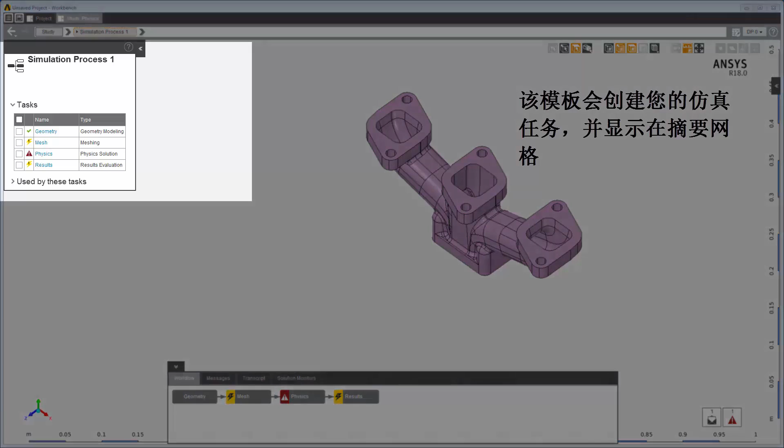The simulation process is made up of distinct but connected steps. AIM calls these tasks. The template creates the tasks of your simulation shown in the summary grid and in the Workflow tab of the View panel. Each task is a connected step in the simulation process. Click on the task to open that task's data panel. Each task is a container for all of the objects and settings within that step.

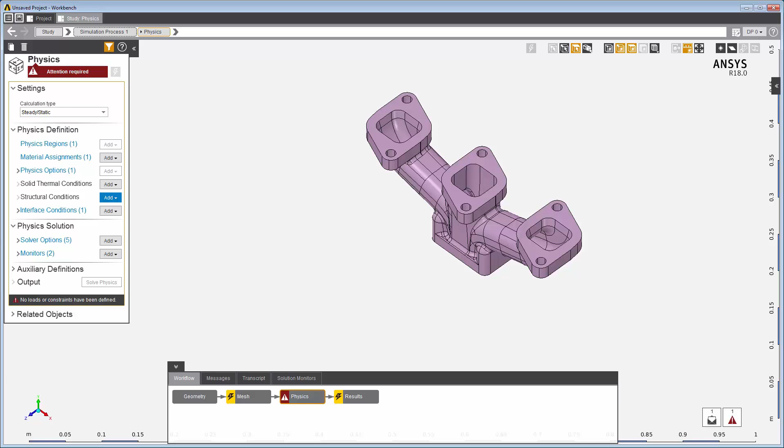Although the starting template adds objects and default settings, you can change any of these to match your specific simulation. If you have questions as you move through the workflow, clicking on question marks will open different kinds of help. Let's start setting up the simulation. Because I enabled model editing, the geometry task is where I can edit the geometry file. Here you can modify an imported geometry or even create a new geometry. Return to the physics simulation by clicking here.

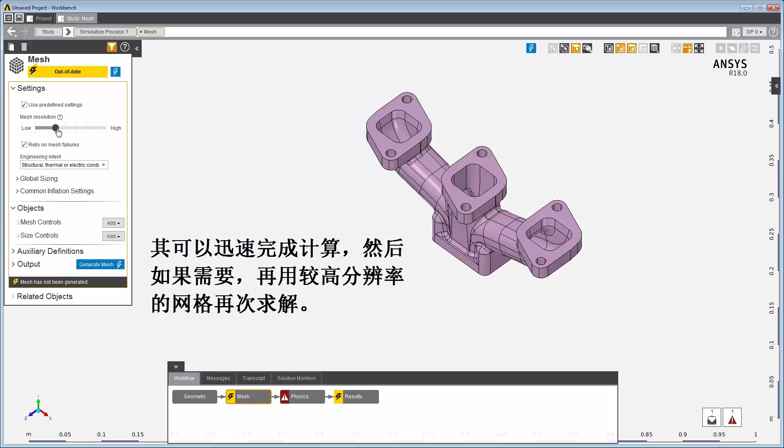Next is the mesh task. Let's review the setup in the mesh data panel. How fine do we want the mesh to be? A good strategy, especially for larger models, is to begin with a lower mesh resolution that calculates quickly and then, if needed, solve again with a higher mesh resolution. You can always come back and refine the entire mesh or add controls to refine specific areas of interest. Updating the mesh task generates the mesh.

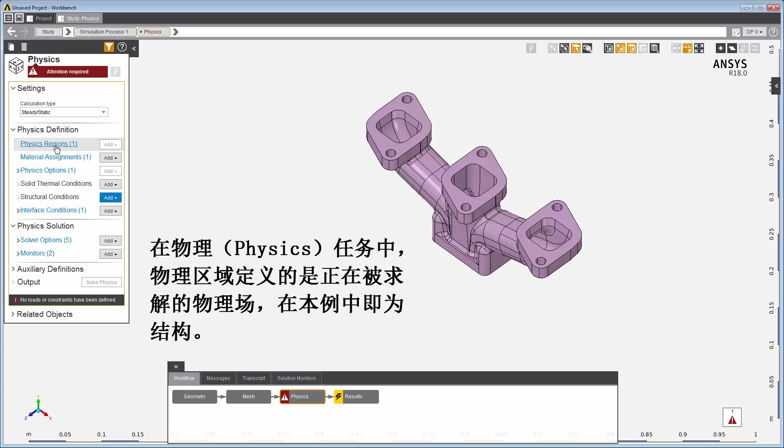Now let's look at the physics task, the next task in the workflow. Here, we set up and solve the physics solution. Again, all of the objects and settings defined by the template can be modified for your own requirements. In the physics task, the physics region defines the physics being solved, in this example, structural. The location field shows that all bodies in the model are part of this physics region.

There are visual cues and messages to help you set up tasks. Attention required means that objects are missing or need information before you can update this task. The Messages tab summarizes the changes needed. Here's a blue color cue to add structural conditions. You can add objects here in the data panel.

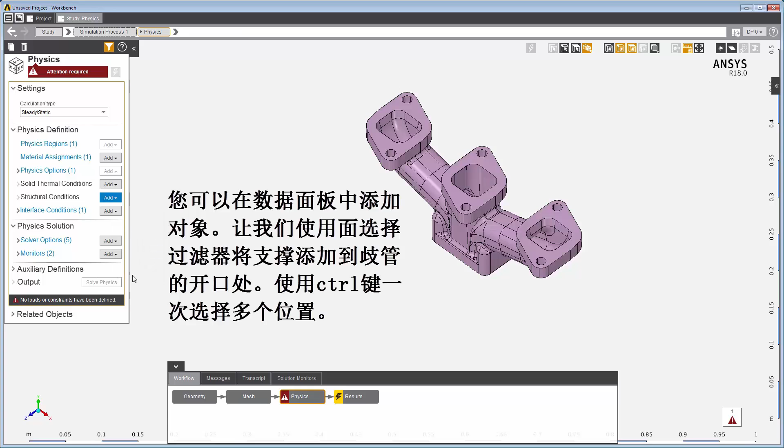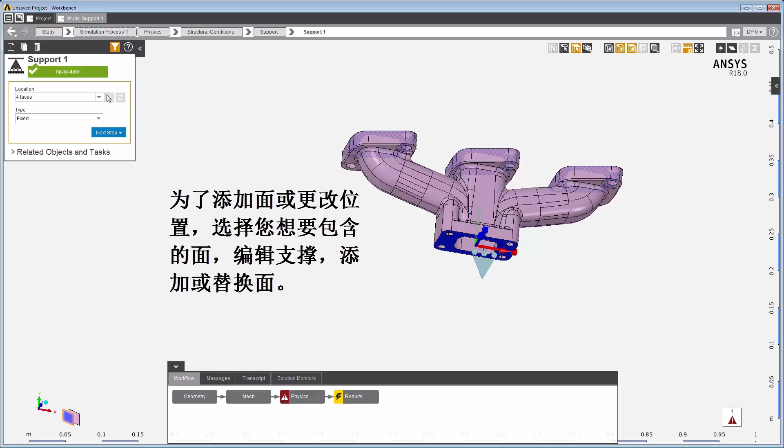Let's add supports to the openings of the manifold using the Face Selection filter. Use the Control key to select multiple locations at once. To add faces or change a location, select the faces you want to include, edit the supports, and add or replace the faces. Right-click to add a temperature condition and apply it to a selected set of faces on the inside of the manifold. The location is listed when you click inside the field.

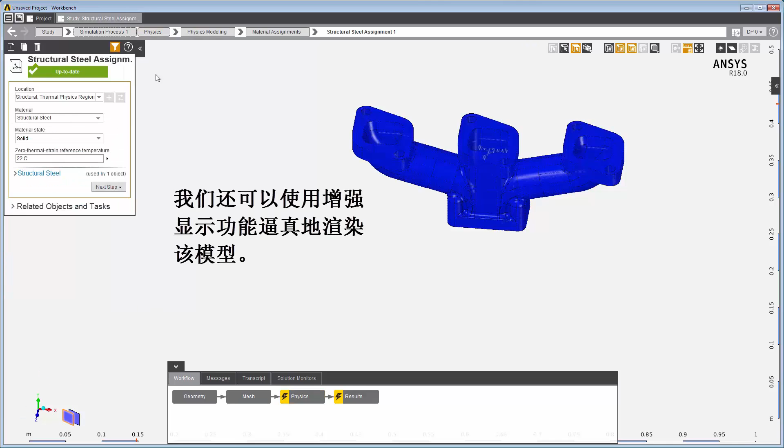Let's confirm that the material is structural steel. We can also realistically render the model using the enhanced display. Solve Physics runs the calculation and updates the physics task. Information about the solution is in the Transcript tab.

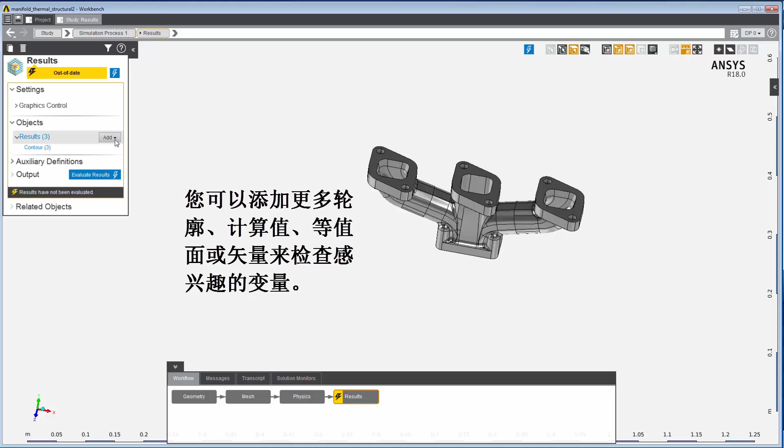With the physics solved, you can visualize the simulation in the Results task. The template automatically adds 3 results, but they have to be updated before you can visualize them. You can add more contours, calculated values, isosurfaces, or vectors to review the variables of interest. Now, updating the Results task evaluates the results. It's easy to animate any of the results and view them simultaneously.

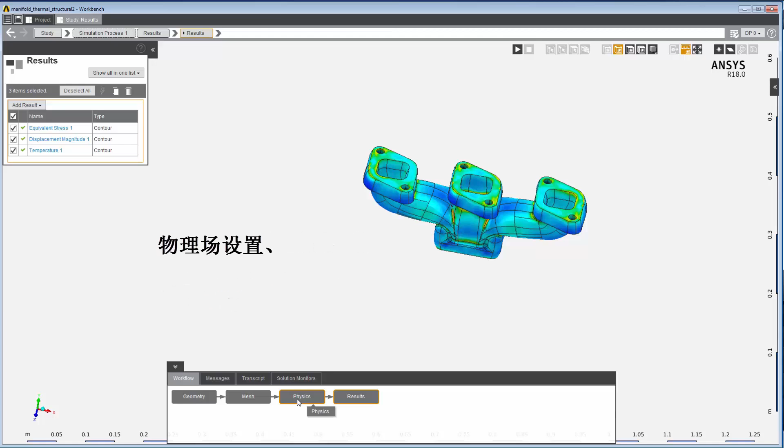We've now completed a simulation in AIM. Once you've reviewed these results, you may want to make refinements or changes to the physics setup, the mesh, or the model, and solve again. This concludes part 1 of Getting Started with AIM. In part 2, I'll show you more about the AIM workspace.